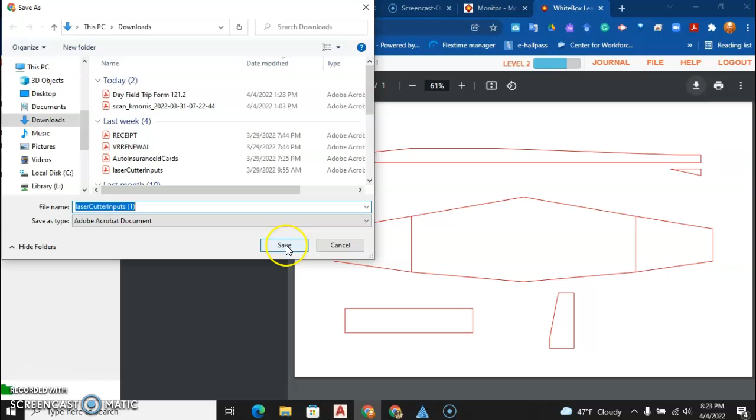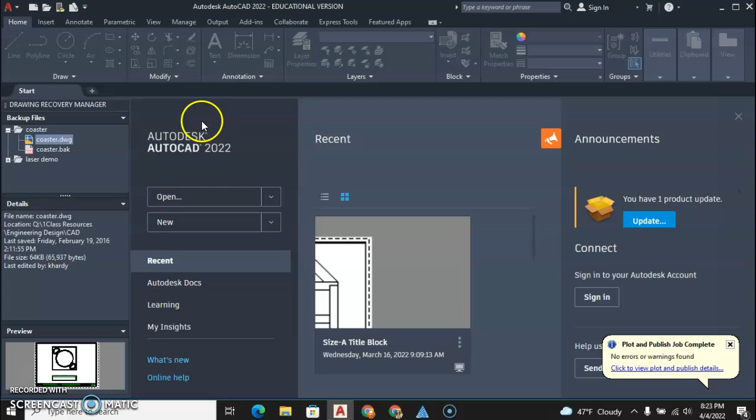So we're going to save this in our downloads. And you can call it, I'm just going to leave it as the laser cutter inputs. So I'll hit save here. That goes to downloads. We're going to keep in mind where we have put that. Now we know that's in downloads. We're going to open up AutoCAD. AutoCAD is on the desktop. When you open AutoCAD up, just open a new file. So we'll launch a new file here.

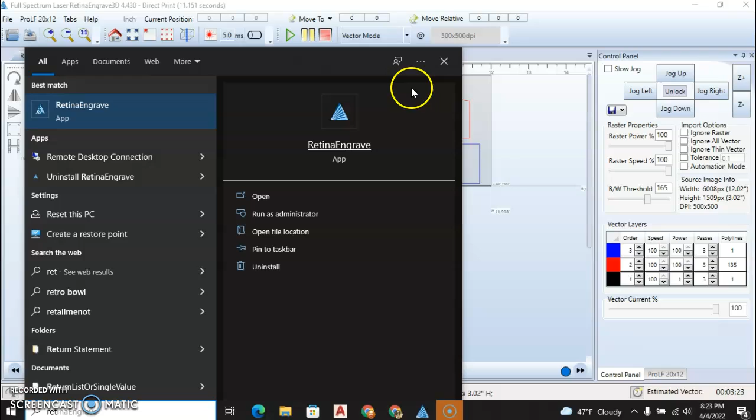The other program that we're going to want to open is Retina Engrave. This is the Retina Engrave program. You might want to type it in the search, RET, and launch that Retina Engrave app. So open up Retina Engrave and open up AutoCAD. Within AutoCAD, we're going to import that download. So we need to go to Insert, go to the PDF import, which is right in the center of the upper toolbar there, and we're going to select what we downloaded and bring that in.

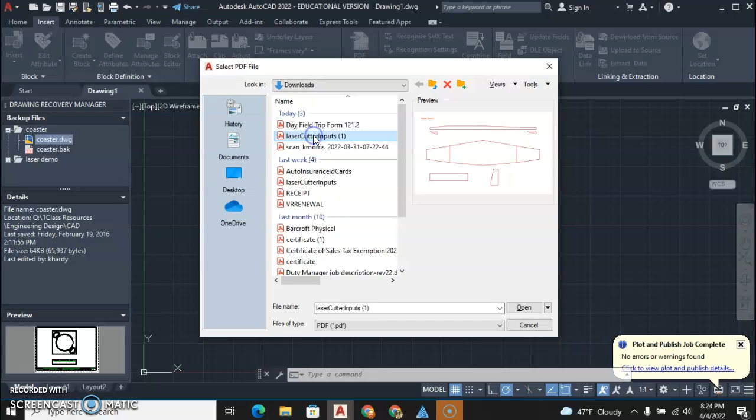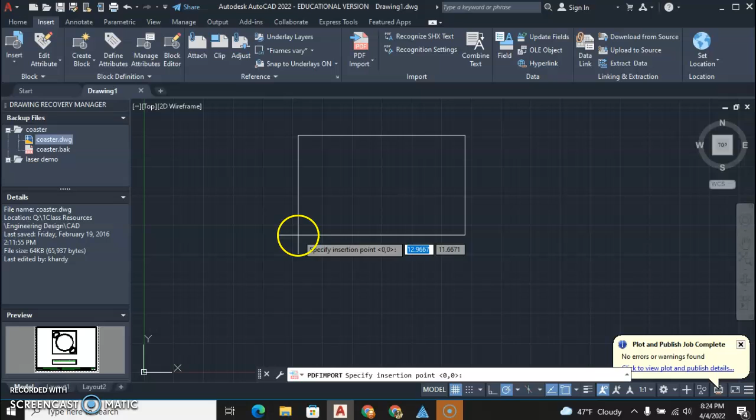So here's our laser cutter inputs right here from my downloads folder. Again, this will only work on a laptop, not the Chromebook. And you're going to open that up. Now here we can specify the insertion point on screen, or you can just let it go where it's going to go. Most important though is that our scale is 1. You want it to come in at 100%. So we bring that in, and I'm specifying on screen. We're going to bring it right here.

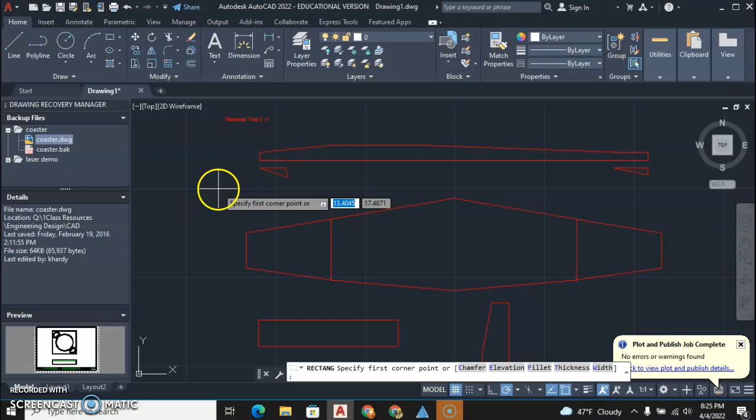So here's my file, and in essence it is ready for the laser cutter, but we need to define the area of our stock that we're going to be cutting out. So in AutoCAD, go to Home. You want to draw a rectangle. We have 2 sheets of stock to cut our wings out of. The wing, the bigger piece, is going to be a 12 by 3 rectangle. Okay, and I just used the rectangle tool when I drew that. That's this tool right here. And we're going to move that so that our wing is inside of it.

Now with this particular wing design, there's not a lot else I can get on this sheet. If I can put my horizontal stabilizer and my vertical tail fin on the sheet as well, I would do that. And that would help save some stock later on. So I am going to move these little triangles up here because they will fit in here. So if I select the triangle, and maybe what I'll do is come across using the green selection that selects everything it touches in green, and I will do the move, and we'll just move these guys down onto our stock. In fact, we'll put them down here, down on the bottom.

Okay, and then just to show you, I guess I can bring that tail fin over too. We'll rotate this tail fin. So I have that selected. I use the rotate tool, and I just pick a point on here, and I can flip that tail fin around like that. I'll select it again and do move, and we'll grab that. Just so you can see, we can get that tail fin to fit on here. It looks like I didn't grab quite everything in the move, because our shape is missing a line there. We'll move that up there. This horizontal stabilizer is going to have to be printed onto a different piece of stock.

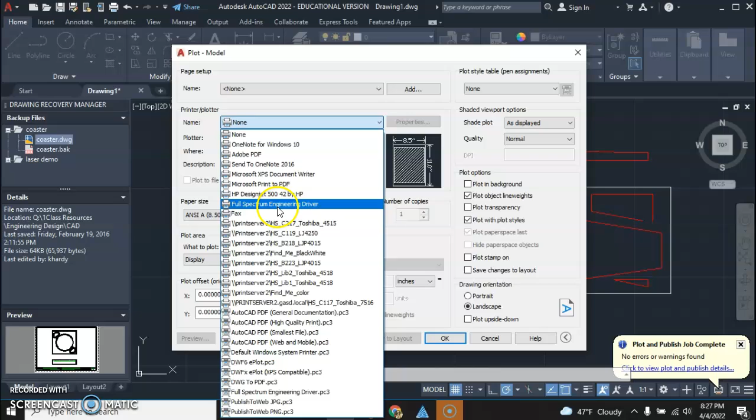Now I have my stock set up. All we need to do is output over to the laser, Retina Engrave. And so that is using a print dialog. You come up here to the printer, and we're going to designate the Full Spectrum Engineering driver. That's important. The Full Spectrum Engineering driver, that is our laser cutter. And we are going to choose the Full Spectrum Laser Professional Series 20 by 12 paper size.

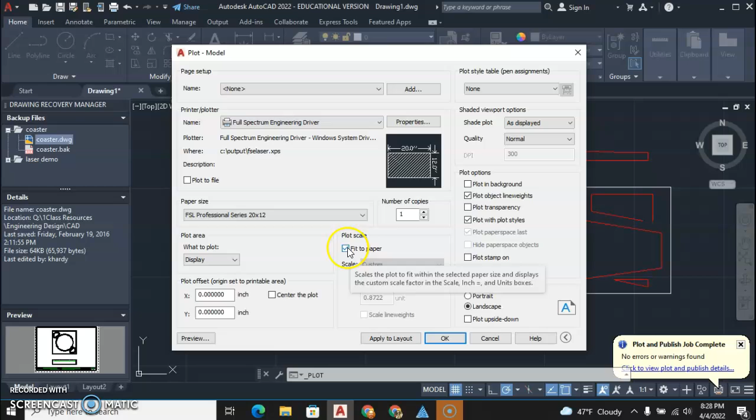It's a 20 by 12 display there. And then very important, your plot scale needs to be 1 to 1. So 1 inch equals 1 unit. Okay, and what we are printing is actually going to be a window. So the plot area needs to be changed to window.

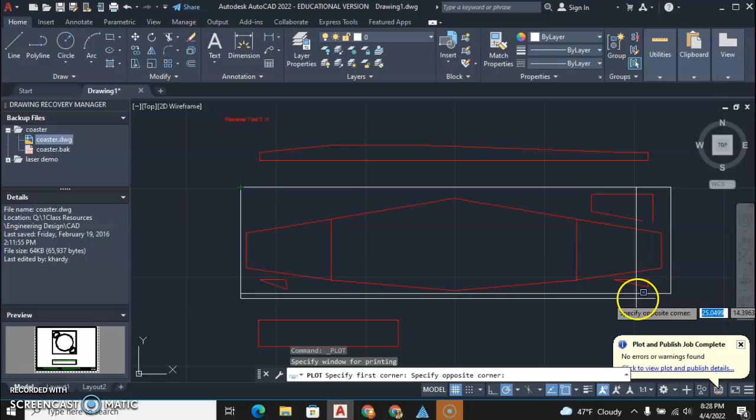Click that drop down and designate window. Now when you do this, the print screen will go away, and this is where we need to select the stock. And you see you have that in the window. This is what we want to print. That window has now been designated.

If I needed to change that window, for example, when I come back to print on the smaller stock, I'll need to redraw a window. And so if I want to rechange that, I just click here and it will allow me to do it again. So this is the window, and it allows me to reselect.

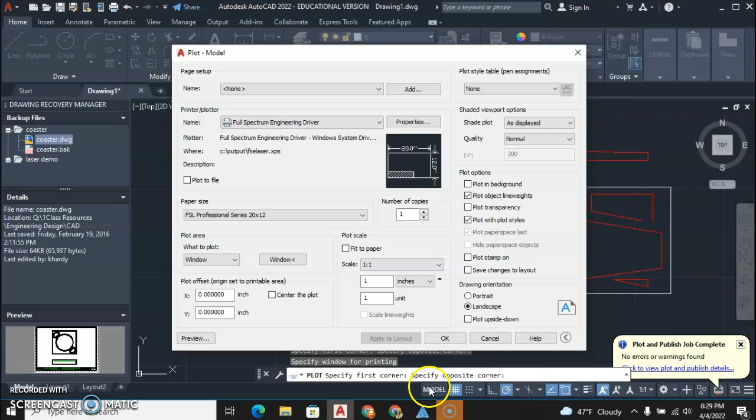So again, 1 to 1, full spectrum engineering driver, and paper size is 20 by 12. If you hit apply to layout, that will memorize that. And we'll go ahead and say OK. Really important, before you click OK, make sure this icon is active, that is retina engrave. I'm going to click OK, and it's sending it over to the laser cutter engraver now.

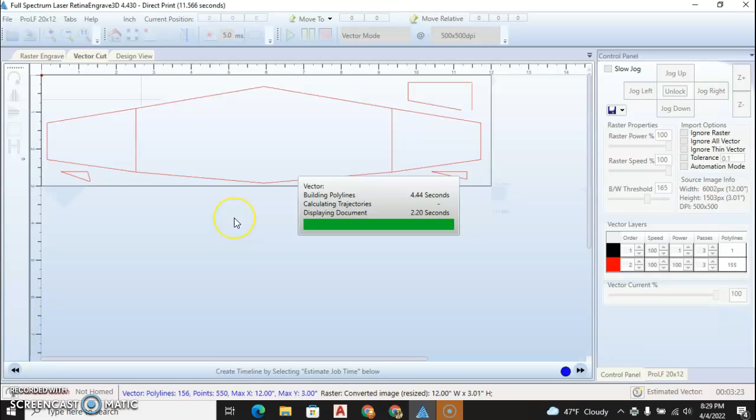So I'm going to switch applications. This is the laser cutter engraver sheet. You see a previous job that I was demonstrating up on the screen. This is going to convert to my most recent job. And so here, my most recent job is up.

Very important, there are tabs across here. Yours may come in as a raster tab. You want to move that to the vector tab. It is in vector that we do the cutting. So move it over to vector. Make sure that your stock size matches up. It should be a 12 by 3. Mine is in a landscape setting. That's how it's going to go in the laser.

Now notice we have 2 layers. We have a black layer representing our outside stock. We have a red layer representing the parts we want to cut out. And you'll see over here that those vector layers also show up. Make your black layer number 1. So change your layer order so the black layer is 1. And your red layer number 2.

So again, change that. Your black layer, we are only going to cut this in a low power. So you're going to change your power setting here. You can actually change it. Let's go all the way down to less than 1, 0.5. We're going to do a 0.5 power setting. So all we're doing is etching the outside of our stock. And we're going to make that go with 1 pass. So it's going to pass one time around the rectangle.

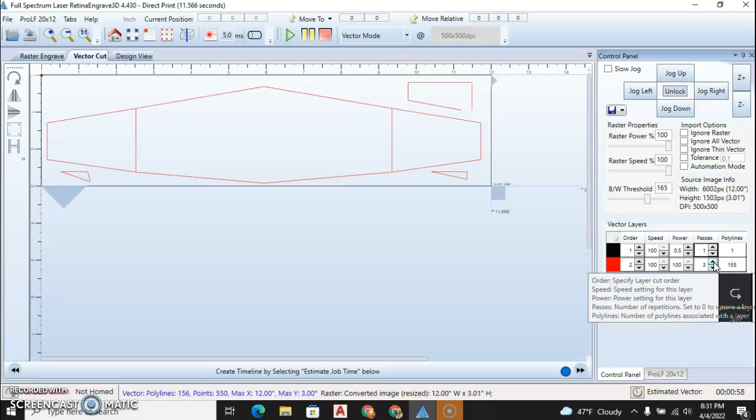And then the actual cutting is going to happen on the red layer. That one we need to be at 100 speed and 100 power. We're going to have it go for 3 passes. So you'll need to change this so it's at 3 passes. If you have those settings marked out, you're now ready to print this.

And so I would recommend you first save your job by going to File, Save Project, save it in an area, maybe your engineering folder area, and we'll just save this as demo. And remember the folder you saved that in. Then you can come back to this project and skip your AutoCAD step if you need to print again.

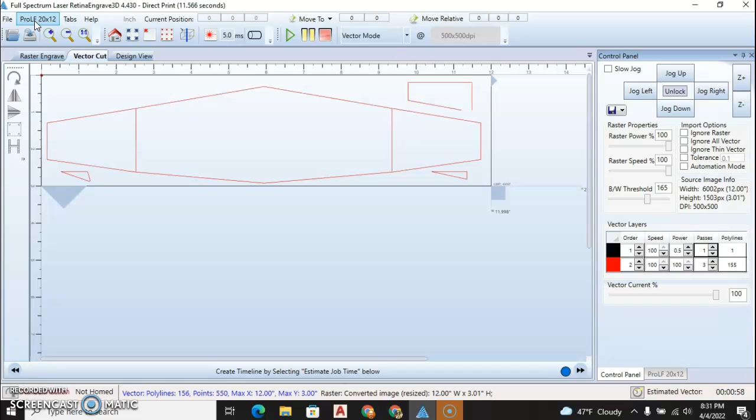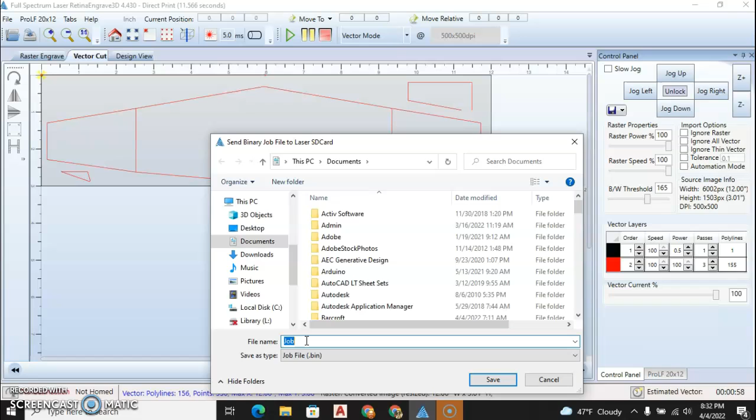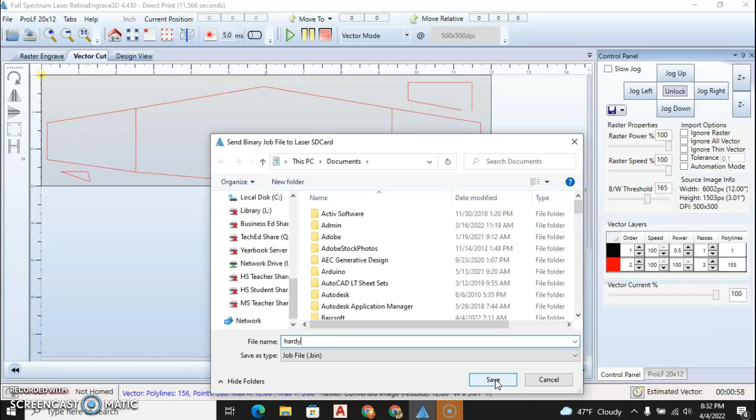So you want to select the USB. I do not have one on this computer right now, but you'd come down here and select USB, and then you'd save that file over there. And it's the USB that we transfer this into the laser itself. So I'll hit save, and then this would be on the USB. We would withdraw the USB and take this over to the laser cutter. Hopefully this helps you prepare your file for cutting on a laser engraver.